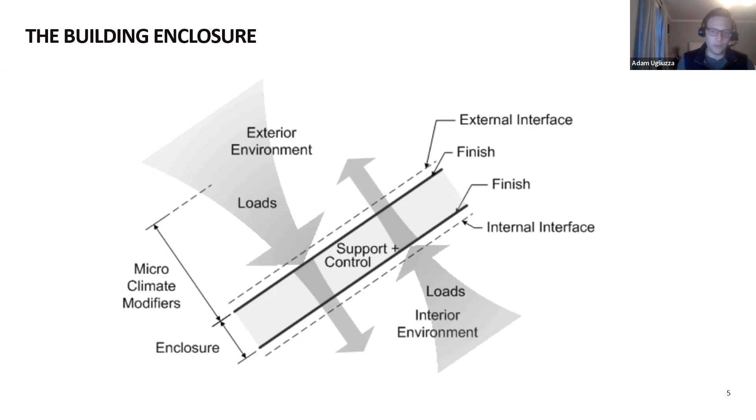So that kind of feeds into what we're trying to do with the interface. We want to make sure that the control layers, when we look at it in this diagram, stay continuous when we get to any type of opening or transition to another part of the building. I'm sure this group's familiar with this sort of diagram, really just outlining the control layers. We want them to be continuous.

People call it the pen test, just tracing that detail. This happens to be a curtain wall system, but for the sake of argument or discussion, our control layers are individually shown there and continuous through the assembly.

Air and water control should always be continuous. You can get away with some lapping with water control, but generally you want to keep your air and water control continuous. Vapor is similar - you don't always need to have that continuous to be functional from a vapor diffusion standpoint. And then thermal control, that's the last.

That's really the last frontier when it comes to enclosure. That's the last big challenge to get through, and we're coming up with great concepts to deal with that as far as thermal bridging of structural connections and cladding and all that.

But anyway, that's certainly a critical part of a great interface. I think air and water is the most critical part to tie in. If we can get thermal control continuous up to the opening and we line up the thermal control of the system through thermal breaks, so that we're not negating or impacting the performance of those thermal break systems, that's great. That comes second, but it's definitely very important.

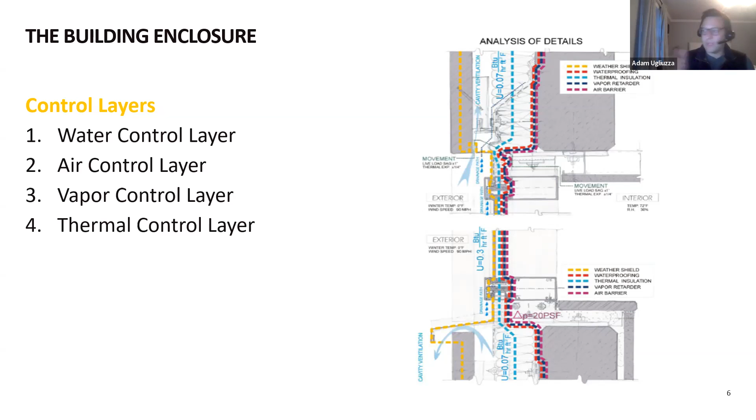Past this - here's a little detail I think is great to visualize when looking at building enclosure design. I get on a lot of design meetings where we just drill down on vapor diffusion, and it means nothing if you don't have air control.

So that air control is typically lost at openings, and we want to make sure that the interfaces around this building are really locked in. If we spend 5 hours on vapor diffusion, but the air barrier never meets the primary seal of the storefront system, you can forget about having vapor diffusion control, because we're going to let all the moist air in or out of the building right around that great layer that we put in.

So having continuous air control is definitely key to the building performing, and even to have the vapor control portion of the wall perform properly.

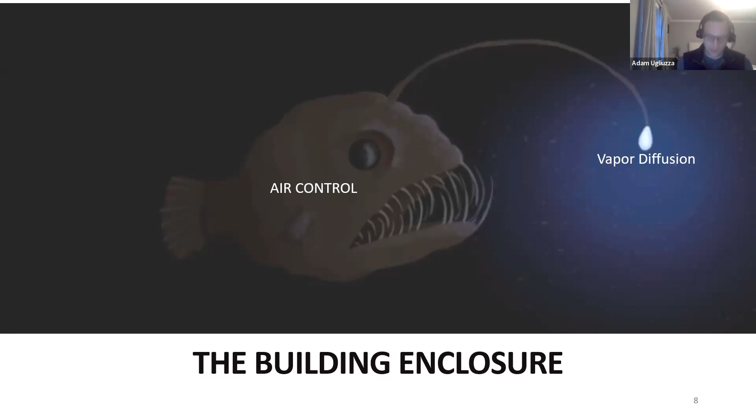So jumping in now to interfacing, I like to include this nailing flange window because it makes interfacing so much easier to understand. When you have a nailing flange, you have this great flange that you can lap onto with a membrane, and that really ties in your primary air and water control layer of the wall directly into the primary line of air and water tightness of that window system.

So in principle, you're locked in, you're good. You have a continuous transition and we're good to go from an air and water standpoint.

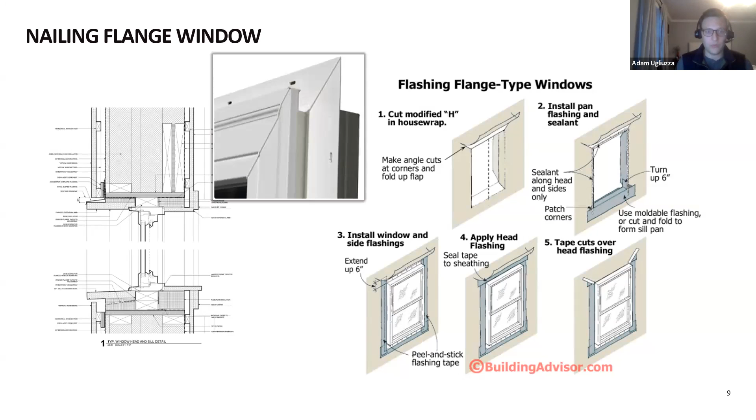I like to take that concept and try to think of it in a commercial setting. With storefront, you don't have that nice little nailing flange that you can lap a membrane onto. So we either have to do it with a perimeter joint, or now it's not as common, but it's starting to become more common, a silicone sheet can be used to lap onto the outer edge of the storefront system. It's starting to gain some traction, but typically a perimeter joint is the common practice for sealing the storefront system at the opening.

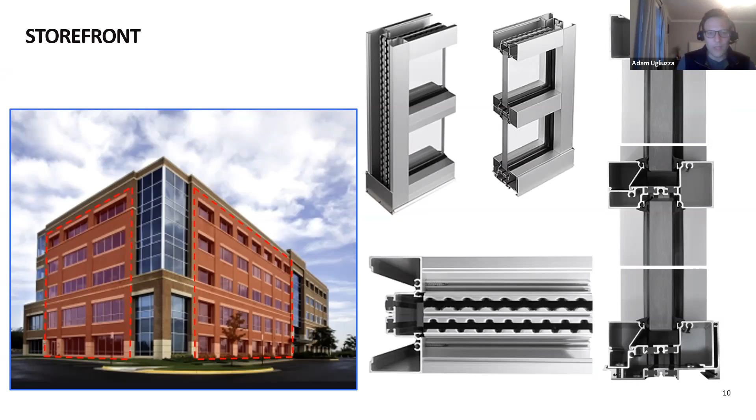Now, getting the air and water barrier out to that condition is the challenge, whether you're doing it with blocking or some type of collar flashing, that's where the challenge comes in. And then how does that all marry together with the cladding that wants to come in the same space? So it definitely is difficult, and we'll get into some solutions later on.

Curtain wall, I think we can breeze through this. Curtain wall is great in that you have the ability, especially with pressure wall, not all curtain walls are exactly like this, but the difference between the two here is that with curtain wall you really get the opportunity to put two seals in. You have your outer bulk water seal, and then your primary can actually be set back. That little change in the system design provides you so much more flexibility when it comes to interfacing.

Because you have that 2-inch of return, we'll call it, around the perimeter, that allows you to tie into the backup wall. And then you've got this space in front of it that can seal to the cladding, and it's not all bunched up. The primary seal doesn't have to do multiple roles - it doesn't have to be the bulk water, the aesthetic seal, and also the primary seal that keeps air and water out of the building. It can be a separate bulk water seal that just seals the cladding and looks nice.

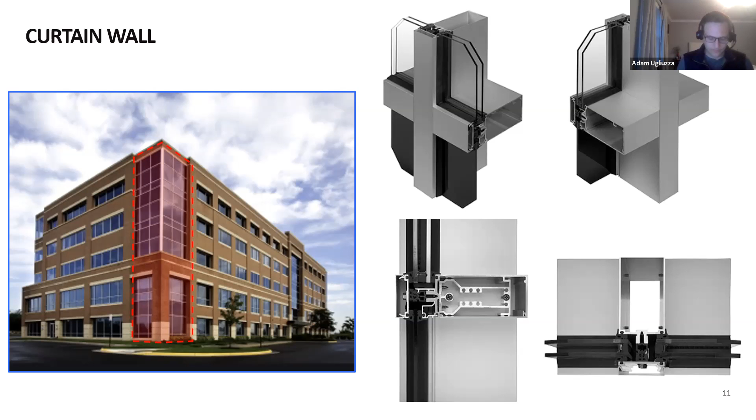So that's the big difference between curtain wall and storefront. Your storefront, your primary is at the front, and you really got to make it dead on to seal to the air barrier, the framing, and to the cladding all at the same time if you're using one joint. There's other methods of how to do that, but it's just more difficult, and a lot of, as far as tolerances on the job, it's just more critical that things are being put together and sequenced right to get it to go right. Curtain wall is just a little easier to deal with.

So I think it's important just to understand performance criteria for these systems. When we see a product data sheet in a spec, or product performance in a spec, understanding where that data comes from. I think everybody on this call has a good idea where the air barrier information comes from. We're running 283.

So this is the performance criteria for what we will call a glazing system. Typically your system's being tested in the laboratory at 6.24 pounds per square foot, and you're allowed 0.06 CFM per square foot. Then the water performance can vary depending on what storefront system you use, but generally you're at 8 to 15 pounds at performance. That's what we're asking for in the lab.

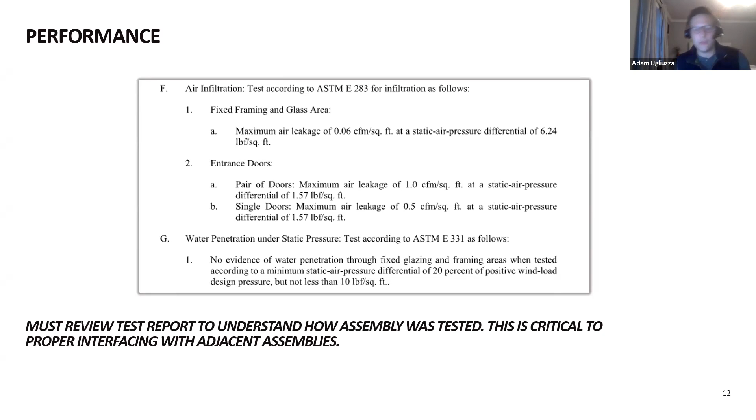I want you to see, I think it's critical to see how we're testing it, and then how that translates to the field. So similarly, we've got for air barriers, ASTM E2357. This is an assembly test. So the key part I want to point out is that even in the assembly test, we've got this generic coverage - penetrations, cladding attachment in that assembly test - but that window opening detail is really generic.

And we're not tackling that interface, which is understandable. We're trying to test the air barrier assembly and not test every single window type and glazing type that's out there in the market. But it's key to understand that just because you have an assembly that met ASTM E2357 and you have a window assembly that met ASTM E283 for air tightness and water penetration, doesn't mean it's going to work at the opening if they're not connected right.

So these assemblies are tested in a lab separately. When you get on a job, they may not be married together to perform properly. So it's key to understand, just because you have the right materials, that's the first step - putting them together right and designing them to go together right, and then installing them in that manner is the next step, and critical.

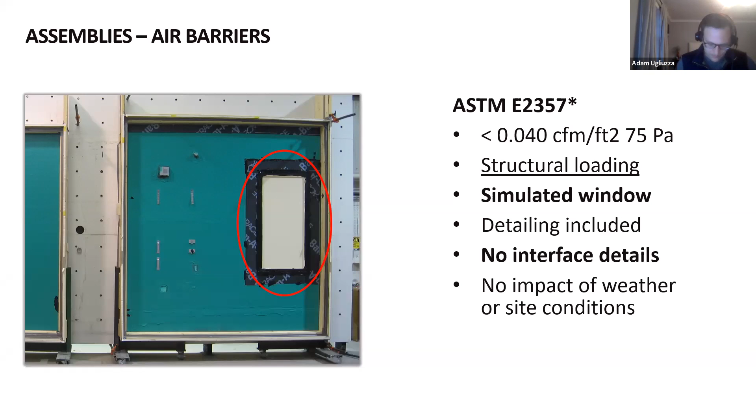So for storefront, this is just a cut of the head condition, the jamb condition. I've noted the red as the primary, so that's the outer seal. This is actually something that in our industry has differing opinions. If you look at air barrier standard details, they only detail to the interior joint.

But the key thing to understand is the air barrier manufacturers are not experts in glazing systems. The key thing you have to remember, they're thinking of just air tightness. So they're saying, okay, the interior joint can control air, will be airtight if we tie the air barrier into the interior joint. The problem is that this system really can't handle water inboard of that outer joint.

So if you're relying on cladding, flashing, or some other trade to keep water out of the head of that storefront system, there's a good chance that something's going to go wrong, or something's going to go wrong over time, because water, once it gets into the head, it's really not designed to be directed and drained out of that system.

Here's why. One, on your left, you've just got a cavity that water would collect in. But the other important part is that on that right detail, this is what you would see looking down the jamb condition. So the glass is exposed at the top.

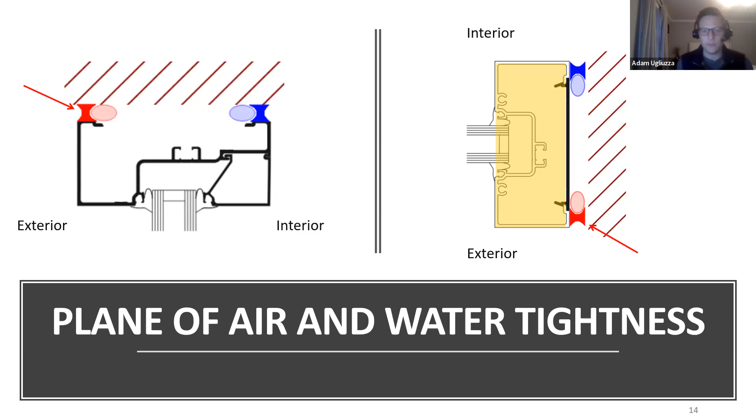So here's an example of that air and water testing of a storefront system in the lab. And the one thing I want you to note is that the buck that is put in there is basically air and water tight. So any water that could get onto the sides or around that system wouldn't be able to get inboard of that red primary joint. So what the test is assuming is that your opening condition is air and water tight.

So if we want to assume the same type of performance, we want to make sure our opening on the job site is air and water tight. All the way back, it picks up the outer primary joint and the interior secondary joint.

I've noted here, this is another big part to understand from an air leakage standpoint. When we do air leakage testing, both in the lab and the field, we use what's called a tare bag. And that tare bag basically isolates the storefront system from the perimeter. So even if we've tried to make the buck watertight, sealed it with sealants, there's always extraneous air leakage that could occur that we don't want to group into the storefront system's performance. So that's why we use a tare bag.

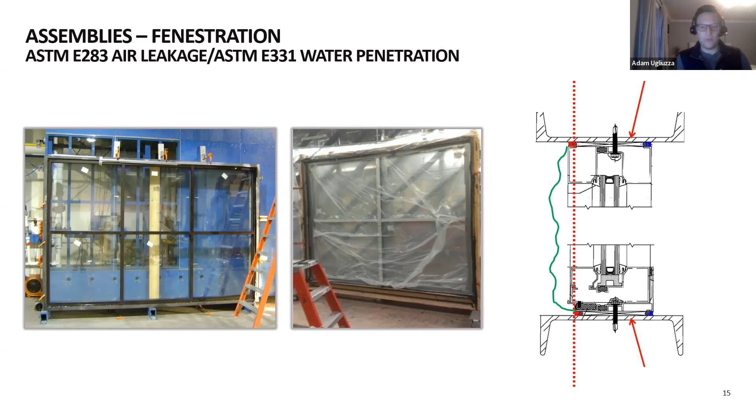So here's an example of what I mean by the storefront being offset from the air water barrier. This is a common detail that happens on a lot of projects. There's our plane of air and water tightness for the wall, shown in green, and there's our plane of air and water tightness for the storefront.

So we've got this breach. From a water control standpoint, we're really relying on the through wall flashing or cladding flashing to keep water out of the head of that window.

From an air control standpoint, if the frame is sealed, they butter the ends and butt the horizontal to the vertical, you might be able to get the system airtight, but you're allowing uncontrolled, unconditioned air from the cavity to get in and around the thermal breaks of that system. So you're allowing cold or warm air to get around the thermal break, and the thermal performance is degraded because you're allowing unconditioned air around it. This could result in condensation in the wintertime.

In the summer, it would be more of a comfort issue or just energy loss. You're allowing that warm air to get around the thermal break and basically negate even having the thermal break there. So making sure that system is closed off from the rain screen cladding is very critical, both from a water and air standpoint.

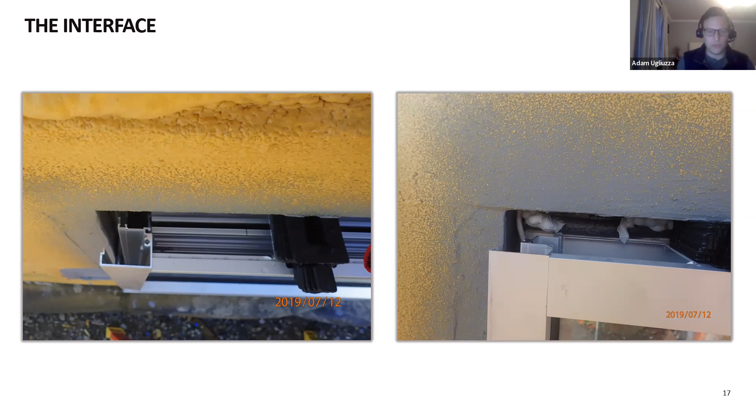So that just gives you a real life example. This was a mock-up we came out to see on one of our projects, and we saw that offset. We warned them of that offset exposing the storefront to the cavity. We ended up using a collar flashing to help them fix that condition. Before that, they were just going to leave the frame as is, so you just warn them of the performance issues you could have.

So thermal performance, I touched on this. This is really what we're getting at when it comes to interfacing too. The way we calculate U value and condensation resistance in the lab really heavily relies on air tightness, and I'll explain why.

So when we're specifying a U value or condensation resistance factor, we're assuming when we get that product data sheet that we're going to get that performance. But there are things you have to understand that go into that number, so make sure you understand how to interface it in the field to get that same performance or similar performance.

You could argue that you might not ever get the performance you're getting in the lab in the field, due to the perimeter condition, at least for now. We've got limitations on how that perimeter has to be constructed, whether it's out of a stainless steel angle that goes around or wood blocking. They're all somewhat conductors of heat, so you do have heat loss there that in the laboratory we're really not testing in that fashion. And I'll show you why.

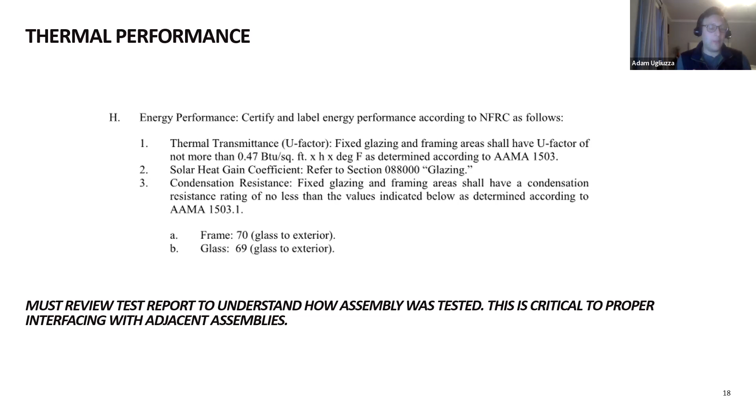It can do, you know, it's really a two-dimensional type analysis, and air is a component that we may have to make the assumption is not a factor. So we have to make the details, make sure it's not a factor. Once we run the therm model, this actually has to get backed up with an actual test using a guarded hot box, which basically validates the data we're collecting in the therm model.

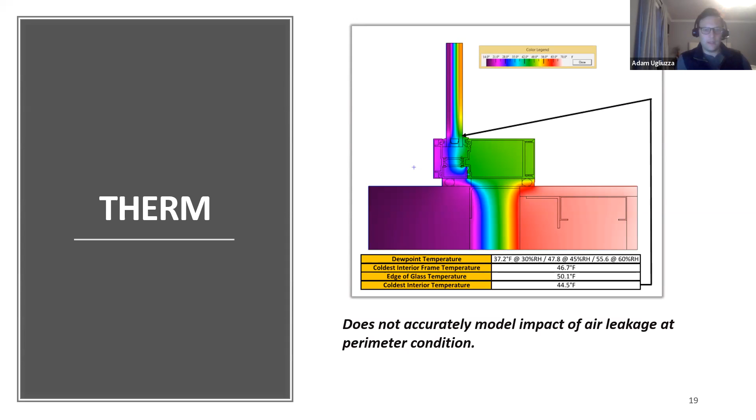In this laboratory test, I'll zoom in close, but we completely take out air leakage as a factor. So all the joints, everything is sealed, because if we allow any type of uncontrolled air through that system, the data becomes too difficult to track and it's not reliable. It spikes and different things happen where the data is not accurate, or it varies. So that just speaks to why air control is so critical.

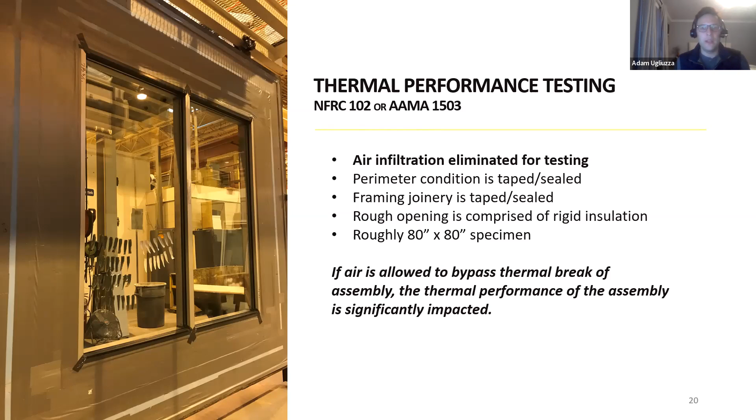There are certain things we can control in the field, the perimeter condition and how it's sealed, the joints in the framing. When we see gaps between the horizontal and vertical framing members, or the glazing beads aren't fitting tightly, all those things are allowing cold air to get in and around the thermal breaks of those systems. So it may work from an air and water standpoint, controlling water in and out of the building, or controlling water collecting in the subsill and getting out. But those gaps are allowing more air to get in and through the assembly and into places where it can affect interior surfaces of that framing, and we could have energy loss or condensation issues.

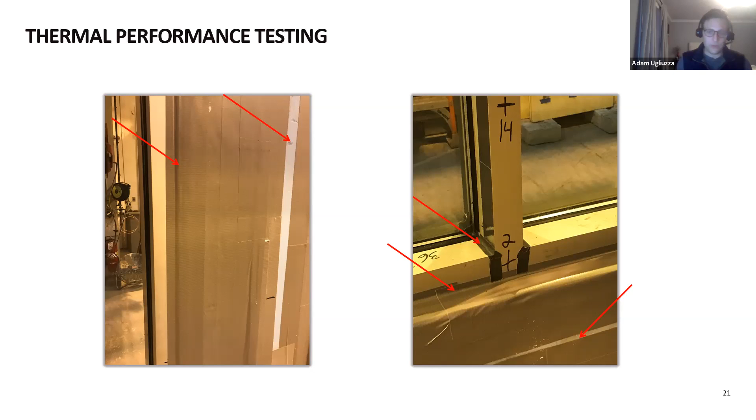Running into the detailing again, one thing that's very common with storefront is you see sill pans shown, metal sill pans, versus the designed subsill that goes with them. So I thought it would be good, because now we're going to dive into more of the field detailing, to start with a historical type opening, a mass wall.

Very common with mass wall construction, you've got a nice veneer brick, and then who knows what's inside the wall. It might be 15, 20 inches thick, but the brick in the center is not continuous, it's not fully mortared shut. So in the old days, as soon as that mortar would break down on the outside, or even if it didn't, we could have water getting into that opening. We really didn't have high performance air and water barriers or waterproofing like we do today that could collect it and drain it out. It was basically in the opening, and it would show up as a leak or leak through the window system.

So sill pans were often used to collect that moisture that came through the wall through cracked brick or areas where the mortar would break down, or just discontinuous transitions, things like that. We know that the brick is not watertight, so it was just a way we knew we had to address it by collecting it and trying to get it out rather than it seeping through, getting to the inside further, or saturating the wall for extended periods of time. So we really heavily relied on flashing to get water out of the building.

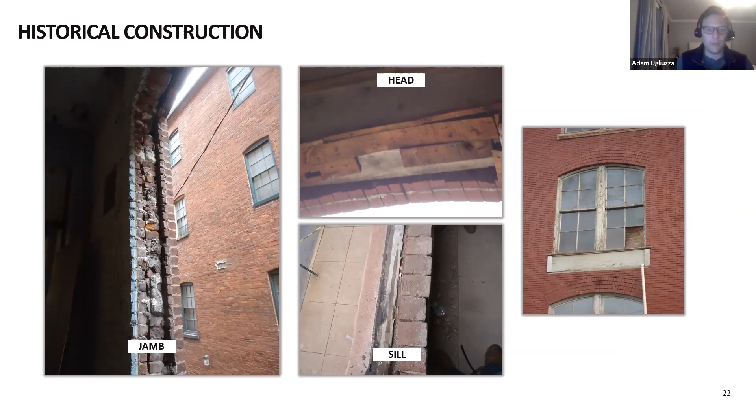The problem in new construction is that sill flashing kind of doesn't have a place anymore, because we've got high performance subsills that can collect water in the opening and collect water from the storefront assembly and drain it out to the front. By penetrating that primary seal with the sill pan flashing, we've got a thermal break. We don't have the ability to seal all the blind fasteners that go through it.

Once you're putting the subsill in, you're going to have to drill down through that sill pan anyway. The other big thing is, if you're worried about the window leaking, you have to worry about the sill pan leaking too, because the same installer is likely going to be installing the sill pan with end dams that can leak. And then you've got to put a subsill on top with the same type of end dams that have to be sealed properly. So in my opinion, getting less out of the opening will help you put the parts in correctly, because you're not smashed into a quarter inch joint with a piece of sheet metal and a sealant joint trying to get this thing air and water tight.

Thermal bridge is another part of it. You just got a thermal conductor going through.

The other big one is that anytime a sill pan, or any type of perimeter flashing, has to go into the opening and be fastened, it has to be installed before the window goes in. So now we're talking a huge construction sequencing issue. If that perimeter flashing has to go in before the window, generally it's either the cladding manufacturer or the cladding installer who has to install that flashing—it's usually part of their scope. So if it requires that flashing to go in first, then the cladding wants to go in first. That means we're delaying the window from going in, and delaying the building from being air and water tight until the window's in, months after the cladding is done.

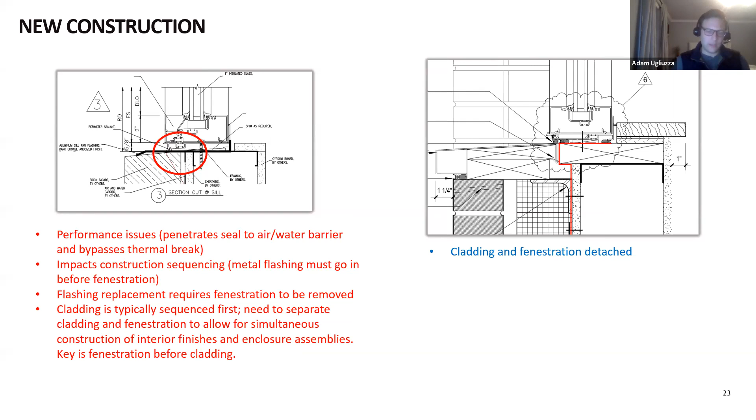Let's shift that system back—let's try to get that primary tied into the air water barrier. On the right there is an example of the system where we've got the primary joint in. We've added a second joint. Now it's tight to do this with storefront, but it can be done. Adding that second joint to the outside, which really acts as a bulk water joint, allows us to do all that cladding and flashing separately. So this system was able to go in when the air and water barrier was finished and we had the building basically air and water tight, and the cladding could come later, simultaneously with the interior finishes. So that's the detail on the right there.

Here's another example of that. This architect had a sill flashing in there. We went to do a mock-up test on the left. This mock-up was an enclosed mock-up—basically a walk-in chamber. So we filled it with smoke and pressurized it. The first thing we saw was a bunch of smoke coming out underneath that flashing, which indicated we had a discontinuity there. It wasn't bedded in sealant, it wasn't tied in properly—we just didn't have that flashing sealed properly.

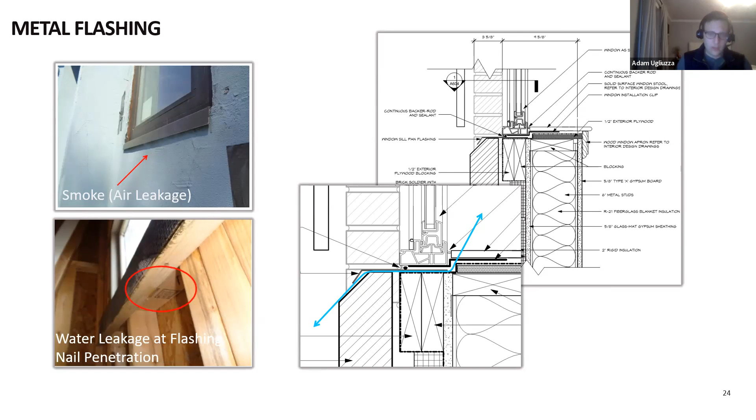So here we took it apart, and this is what I'm talking about. This particular flashing actually wasn't a full sill pan even. It was just a piece of flashing that was stuck into the opening. So we had unsealed edges. When we lifted the flashing up, you could see that blind unsealed penetration.

We can draw it in a detail to put that sealant in, but oftentimes it gets forgotten, or it's not continuous, or they didn't put enough, or they put the flashing in over the sealant and then they moved it, but you can't inspect that. You can't see whether it's continuous after it's done.

It's all covered up. So sometimes you can shove paper underneath it, or some type of rigid sheet of plastic, something that can find its way underneath the flashing to see if that sealant's there. But oftentimes that's really hard to do. So again, it's really difficult to make sure that flashing's been done in a way that keeps air and water out. By relying on a blind bed seal, it can work, but oftentimes it doesn't work.

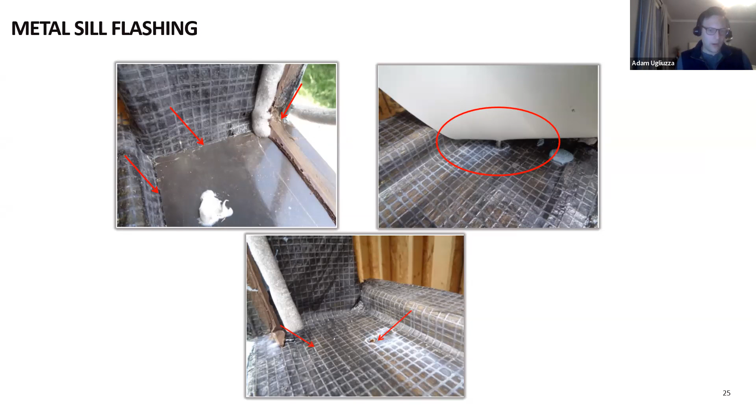In this case, we integrated - now this is a window system, but same concept. The primary joint here is at the outer joint. So in this case, what we did, because we didn't have an alternate way to attach that flashing, they needed that aesthetic flashing on the front. We actually integrated the piece of flashing with another piece of self-adhered membrane, and overlapped it.

And then basically all those fasteners that were exposed down that they had sealant on, we actually had membrane lapped over. So if water did get underneath it, we still had a way to block it from getting further into the opening, because that membrane was lapped on the back side of it. It sealed the side edges and the back edges from allowing it to get further into the opening.

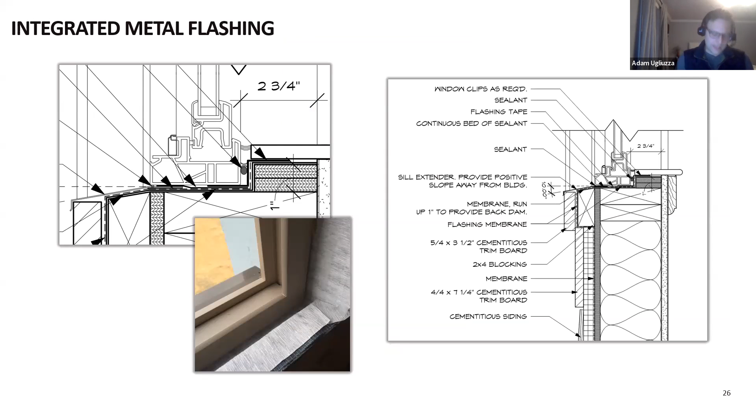So we tested it again. Again, we were able to, by doing the interfacing the way we did, it allowed that we set that window back, we integrated the flashing, we tied the perimeter joint into the air water barrier around the perimeter. We were able to test this thing just with the air water barrier on the wall and the window opening. And here's an example of that.

So this test was actually done at, I believe, 8 pounds of pressure, which is roughly a 40 to 50 mile an hour windstorm, so a wind rain event. After we got that detailing dialed in, we tested probably 15 windows on this site, and every one of them passed. So we were able to integrate that flashing.

It worked. There was sort of a challenge, which I'll bring up next, that we had that flashing integrated. It had to go in first. It sort of was hanging out there. So this is where it comes to construction sequencing, going back to that perimeter flashing, having to put that flashing in and then wanting to get the window in first.

Yes, it makes sense from it getting the building air and water tight. But if we have this flashing hanging out that's integrated with the air water barrier, now we've got this flap that's hanging out that can get damaged. So we got this building air and water tight. They were doing interior finishes, but then they had a bunch of openings where guys were on the lifts and they were just hitting that flashing and it damaged it.

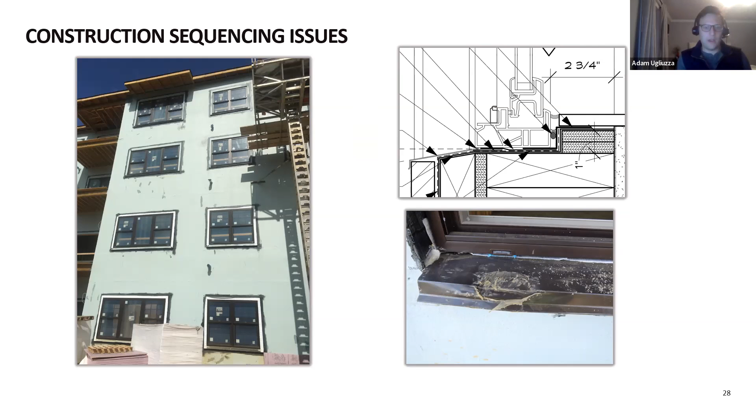So now what do we do? So we go back to that construction sequencing thing. Because it had to go in first, they had to take the windows back out to replace the flashing. So it worked from a performance standpoint, but construction sequencing, we got the order that we wanted, but then it didn't work from a damage standpoint because we had to take out all these windows to fix it and put it back in right. So trying to decouple that flashing from the window itself is very beneficial. There's different tricks to doing that. Up on the top here is an example.

Basically, we've got this flashing, we've got blocking. It's just got a lip that sort of clips onto the back of the blocking and slides down, so it almost acts like a cleat. And then that's allowing to be concealed by that outer bulk water joint.

The lower detail is a flashing receiver. There are fenestration flashing receivers on the market that allow you to screw the flashing receiver onto the opening. It allows for that tie into the primary joint around the perimeter. Then when you're ready to come back later, it's got a clip that actually affixes that flashing into the receiver, and you're done. So it allows for that construction sequencing to happen, and allows for that direct tie into the air water barrier, and everybody's happy.

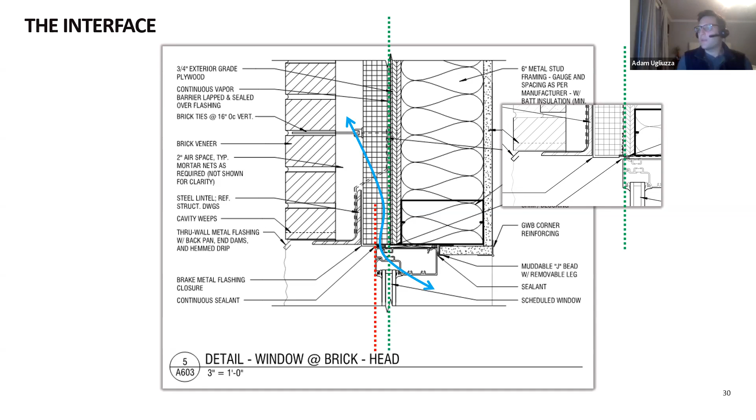Getting close on time, so yeah, just here's another example. Again, this is a window, but this is the idea that we want to have when we go to test the building - take the cladding right off, and we should still be able to perform from an air and water standpoint. If you push that storefront system out and you do not tie the primary joint into the air water barrier, it will fail at one of these mock-up tests almost immediately, because water is going to go right into the framing, drip through all the metal-to-metal joints.

It's going to get on top of the glass and drip through the interior gaskets almost immediately. So when you're thinking of interfacing it, think of it as testing the building naked. Basically take the clothes off of, or in this case, the cladding of that system, and just expose what's actually doing the work from an air and water standpoint. That'll help guide any interface that you're doing, especially storefront and windows.

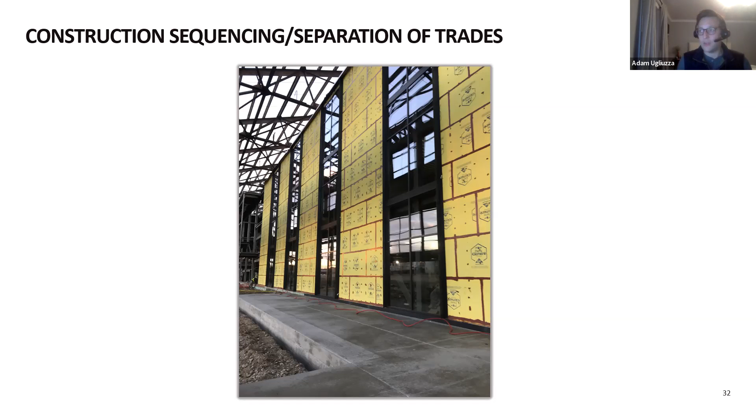A detail can work, and there are many different details that can work in a job, but not all of them will work for the life of the building, construction sequencing, and the best performance. So the interface is the key part. Dialing in on every interface, whether it's wall to roof, curtain wall to wall, or curtain wall to roof, all of those have a component that will impact construction sequencing and performance.

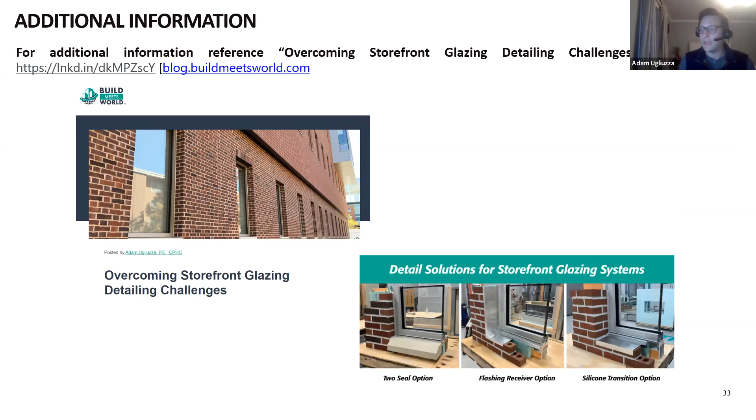If there's any modification to the details we came up with, I'm more than happy to take in that feedback. I wanted to leave a little time at the end for questions. I don't know if there are any, but if there are, I'd answer those now.

Do we have any questions, Sarah? We do not, but I have quite a few.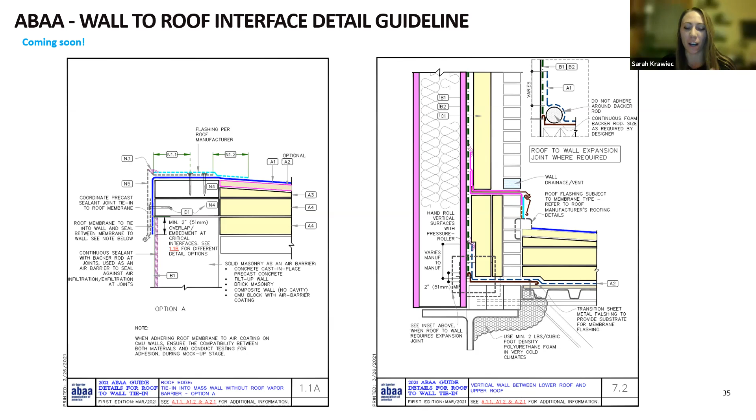You make a really good point about trying to move that window inward. I'm actually working on three projects right now where I think it was slide 31, yeah 30, where the window is slightly outboard and the primary seal is to the exterior cladding.

However, the commissioning agent wants to test this facade, like you said, with no cladding on it. But we're coming back saying that's not going to work because the design is actually using the cladding as the primary seal. So from a contractor's perspective, is there a reason why that's happening? Perhaps the commissioning side is moving faster than what people are designing. Is that a building enclosure commissioning agent or MEP?

I'm surprised that the enclosure commissioning agent would be in that direction, but yeah, it's a commissioning agent. I think the industry hasn't done a good job at defining that. It's not as clear with storefront, and the storefront manufacturers are starting to provide more information.

Kawneer, I know, has actually tested with a silicone sheet where they show it tied out to the exterior face of the system, basically saying that's where their primary seal is. Now, the literature out there is not super clear, we just know from experience doing it, in the enclosure or building science world, where that primary joint typically lies. I feel like in our world it's accepted as being on the outer joint as the primary, just because we know that system can't handle moisture inboard of it, or air. But like I said, for air barriers, I could pull up any air barrier manufacturer's detail and they're only showing the interior tied in.

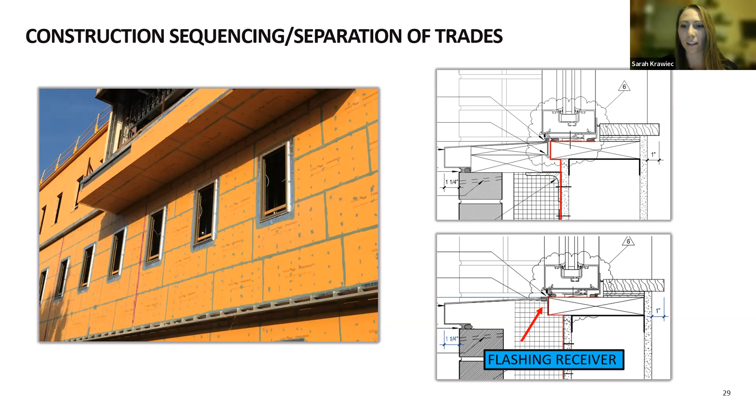Yes, check out the blog I sent. I think there's a lot of good visuals in there, basically of the corner of the unit I filmed around the jamb and the sill, and you can see a real example of it.

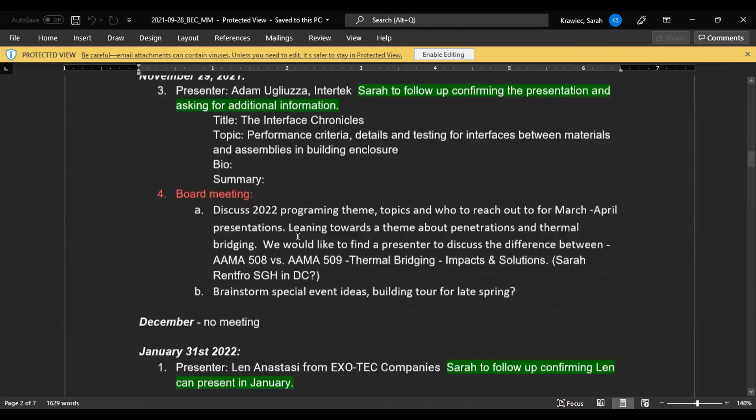I'm sorry, I think I missed the last meeting, but I don't know who Lori and Matthew are. Yeah, you have to give the syllabus. You have to put the syllabi up. Oh, from your summary that you sent out a while ago. Yes, right. It's Lori Ferriss from Goody Clancy. Oh, nice. Yeah, and Matt Carlton.

Right, well Matt Carlton's was a different topic, on LEED and enclosure commissioning. His topic was balancing your building architect's guide to LEED and balancing client expectations, so it's not like HVAC balancing, it's about building enclosure commissioning. I think Richard Kelleher really wanted a presentation like this, where people ask for building enclosure commissioning for a LEED credit, but it's not the same as the ASTM standard and other standards.

Right, and yeah, I think that's really valuable. Let's see, I don't have his summary because I didn't get that far into asking him yet, or maybe I do, it's somewhere buried in my emails. But I can ask him about it, because what I'm finding and would also like someone to present on is when they put all these commissioning tests in their specifications, but the client doesn't want to pay for all of them. For instance, a dynamic fan test - the specs say yeah, that sounds great, and then the client finds out it's, say, $10,000, just an arbitrary number, and they're like no, we don't want to do that. So I think it's valuable going over setting client expectations.

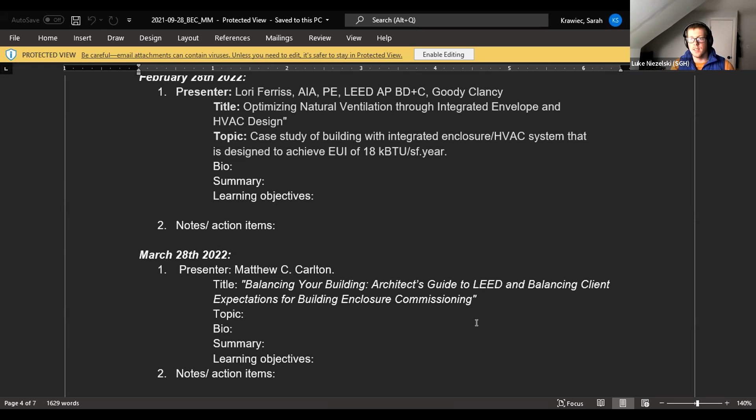Trying to think of a theme. But I don't know, I like both of these presentations. I don't think there's a problem with them, especially if you've already reached out to them. Okay, yeah. Matt's - whenever we were planning the symposium, it was between Matt and another person to go on to commissioning, so whenever we read his abstract, it definitely seemed interesting. Okay, nice. Yeah, okay, so I will reach out to them too and confirm for February and March.

So that puts us - I don't know if we want to talk about April and May, or do we want to talk about special events? I don't know if we have a better idea of COVID restrictions around that time, if we want to start to plan a building tour that we can align with a presenter in the summertime. Does anyone have any ideas about that?

I don't have any ideas, but I support a building tour. I'll dig through my emails because I remember speaking with somebody about touring a project. I just can't remember which one it was. Okay, let's see, I think I have notes at the bottom.

These are previous ideas that we talked about, I believe, in the beginning of the summer: planning for renewable and land use, and choosing and specifying green products that reduce embodied carbon, which I think is a really good point.

So I was in the field talking to Maria at WJE, and she said she's working with a client who wants to use all renewable materials, like no mineral wool and no foam. She was talking to them, saying sure, you want to choose products with low embodied carbon, but if your building is going to leak, or if it's not thermally efficient, then are you really building an efficient building?

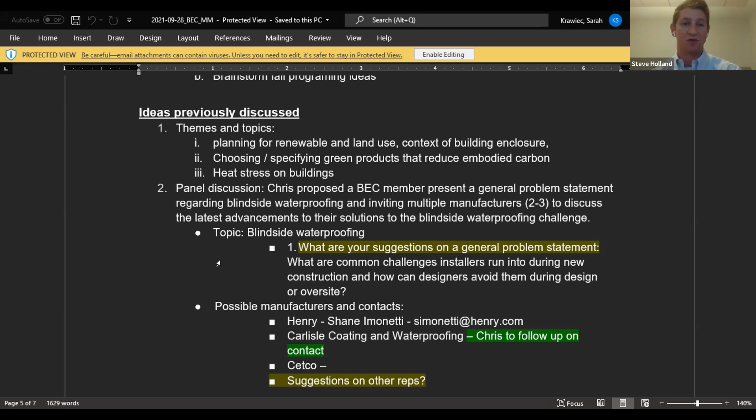And now we're kind of coming back the other way, saying that some of those decisions are hurting us. So I feel like if it could be tailored to just enclosure related, that could be a really interesting presentation.

Maria was saying how they didn't want to have continuous insulation on the exterior, so they ended up having this really thick wall and just filling it with insulation. She said, I really think you should have continuous, and they said, no, we don't want anything. And she was like, okay. But to your point, embodied carbon is such a huge buzzword now that maybe someone has a presentation about why don't we focus on things that are already established, like EPDs, and how you can use them more efficiently than trying to chase this arbitrary embodied carbon number that no one really understands yet.

And it was actually invented by the oil companies. Well, that doesn't surprise me. It was, but anyway, that's neither here nor there. But I agree with you, Sarah, that's really chasing that number around.

I think there's got to be more meaningful ways to look at it, and life cycle cost is something I've always looked at, like performance of products and life cycle costs. It's great to use a green insulation, but if its R-value is like 2, and it costs just as much to produce, then what's the sense?

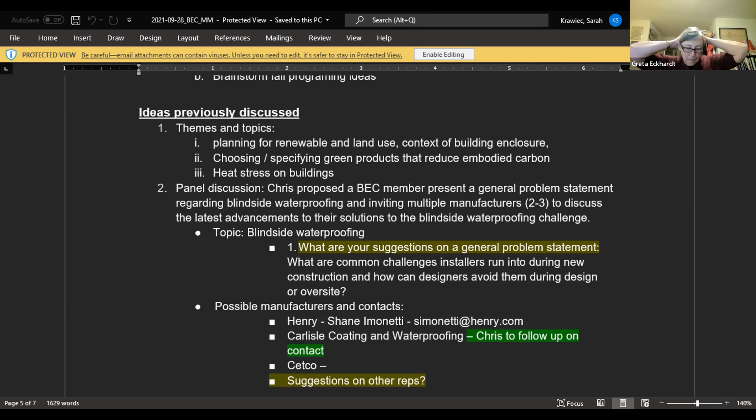Well, maybe we should all try to think of resource people we could come up with, because we have a few months. Maybe you can, Ryan, reach out to Gensler, maybe over - I know we're kind of going into the holiday season - but just to see if they have a contact we could reach out to.

And say if they give you a contact over the next two weeks, or even the first week of New Year's, that still gives us, I guess, a month to find someone. Well, because we're already booked out till March, so.

But if all they're doing is harping on embodied carbon, then they might not be the right one. Because I think one of the hopes of this is that we'll get somebody who can talk about EPDs and open up people's minds to all the other important factors. So, absolutely, I'll pursue that and see what I can find.

I know I personally don't know anyone. I can ask friends if they do, and we can kind of send a mass email if we have any contacts by the beginning of January, or the first two weeks in January.

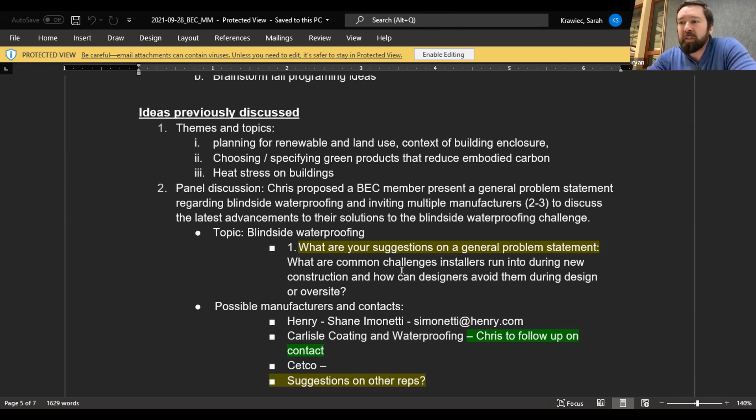I know a lot of people who have had EPDs done on the manufacturer side, but that's not exactly what we're looking for. But there's a few avenues I can investigate, and if I come up with anything good, I'll let you know.

Thank you, Ryan. So before we kind of move on, I think we're pretty good - we have 3 events, and then the 4th one in the works.

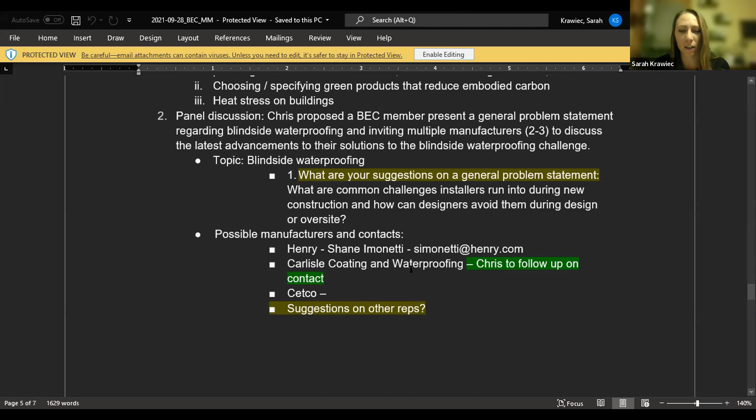And for special event ideas, we've been bouncing around the idea of a hands-on mock-up or a rodeo. I was also throwing out the idea of maybe having a specific meeting that's not necessarily tailored towards architects, but building owners.

And I think what would be unique about that presentation is we would have to spend more time targeting audience members who normally don't follow our social media. But perhaps we can talk about what to expect during construction, or whatever you guys think a building owner should know.

But I feel like we're kind of missing out on a key sector of the industry. What if we tried to target just college and university and higher ed type stuff, because they have official people who would engage in these sort of discussions, and they all build 100-year buildings. It might make more sense than having people that do colleges, people that do hospitals, and people that do low-income housing all in the same room.

At least they'd kind of all know each other. Maybe they'd have some commonality. I don't know, just a thought.

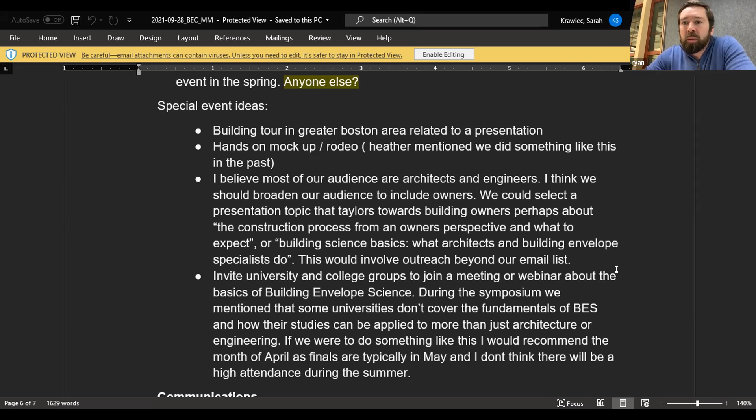Okay, so it's shaping up to be like some of the next steps are a blurb to send to our contacts that touches on what I have here, the basics of envelope science. We're looking to put together this presentation tailored towards facility managers like yourself. Would you be interested in this event? And if so, are there any specific topics you'd like us to cover, or any ideas for us to mention? Sounds good, okay, I'm gonna write that down.

And then we can probably put that together. Does anybody want to volunteer to put that blurb together and have it ready by the end of January? It's a great excuse to reach out to our contacts and wish them a happy new year. I'd be happy to put something together, and then people can tailor it to their specific clients or contacts. Perfect, thank you Steve.

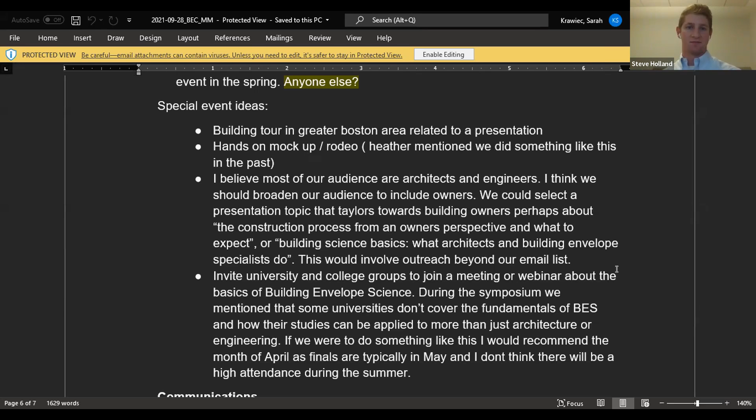All right, so it looks like we are pretty far out, which is great. Another thing I wanted to talk about was in-person meetings versus virtual meetings. Susan Green reached out to me, I don't know if she sent you all the same information, but she invited us to use the BSA space.

I don't know how people feel about that. Maybe the next meeting in January, should we ask them, send a poll, or make the decision ourselves? Do they have a hybrid option? Because I think that would make a big difference in my vote, if there could still be people who can travel into Boston, or the parking there is too expensive. So here is the email from her.

So all of our conference rooms are now outfitted with meeting owls, for those not familiar, meeting owls integrate with 360 video. So we could do a mix then. Cool, okay, so it is hybrid.

So what she was saying is everyone who goes in person is required to wear a mask, and she asked that at least one person from the organization be there to greet our guests.